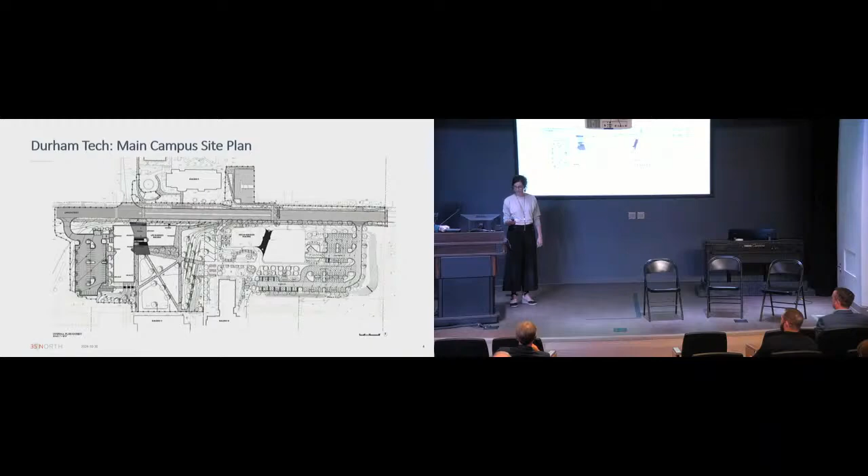Yeah, all right. All right, well, hello Durham Tech. Good to see some good familiar faces.

Before we get started, I just want to give you a bit of orientation of the campus, because you're probably not used to seeing your campus on plan like this. For the folks in the room, East Lawson is to your left, so my right, over here. So that's what we're looking at, East Lawson from left to right. The right of the screen is towards the highway, and to your left is Bacon Street on this side. We're currently in Building 5 over here. The two buildings we're building on the main campus are the Life Sciences building, located over here, and here is the Health Sciences building.

We're also doing two other aspects of construction on the site. The first is going to be improvements to the roads all across East Lawson that you see here. We're also going to be installing a duct bank, which means utilities - low voltage and Duke power lines currently on the poles - are going to be going underground. That's going to create a much nicer walk-in environment for the campus.

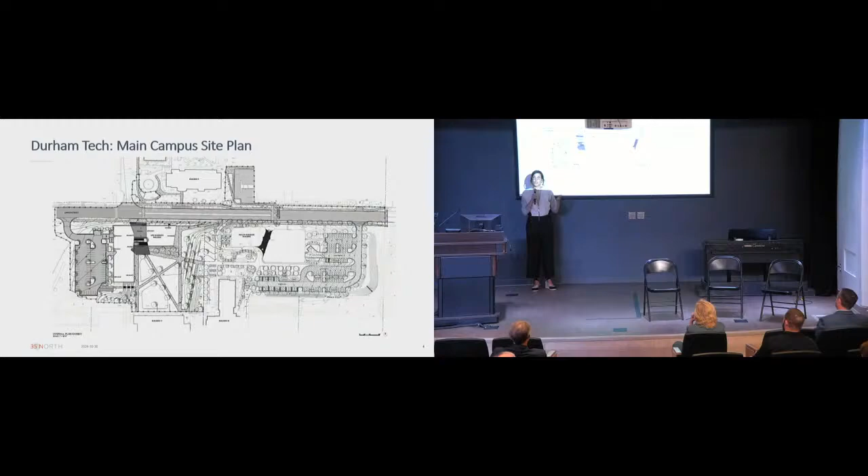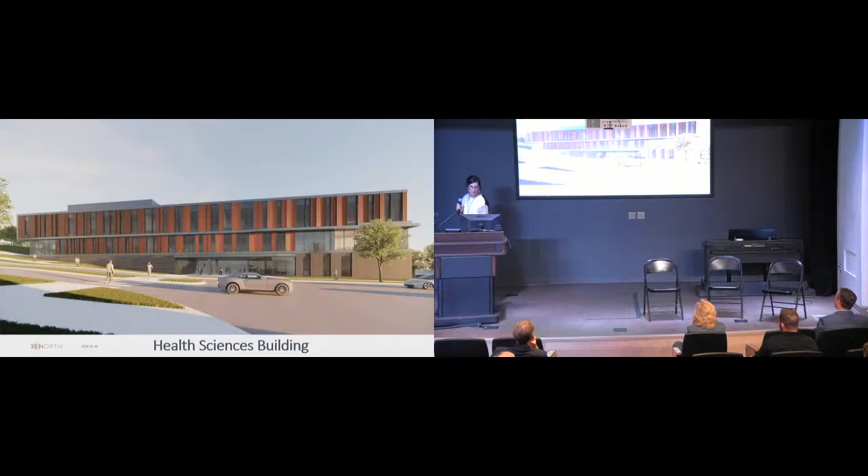Here's an exterior image of what the building is going to look like, from the view of where we're standing essentially today, from Building 5 looking south towards Building 11. Here's a little bit further down the street towards Bacon. And here you have the new pedestrian access, which will allow you to walk into the building, and also up to the second floor plaza that I'll show you a little bit later.

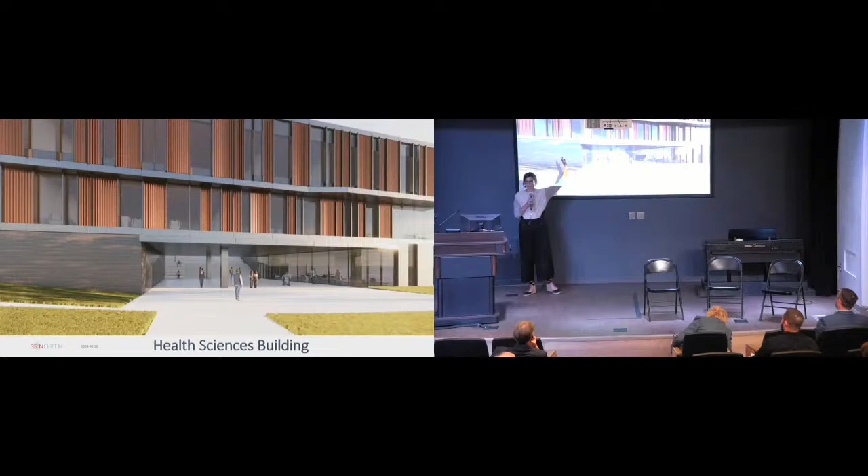Here's an exterior image of the view towards the building if you're standing from Building 11, looking northwise towards Building 5, where we're at today. You'll see the building's a nice L shape, and it's going to create a nice quad green environment where people are going to be able to sit, enjoy, and relax between classes.

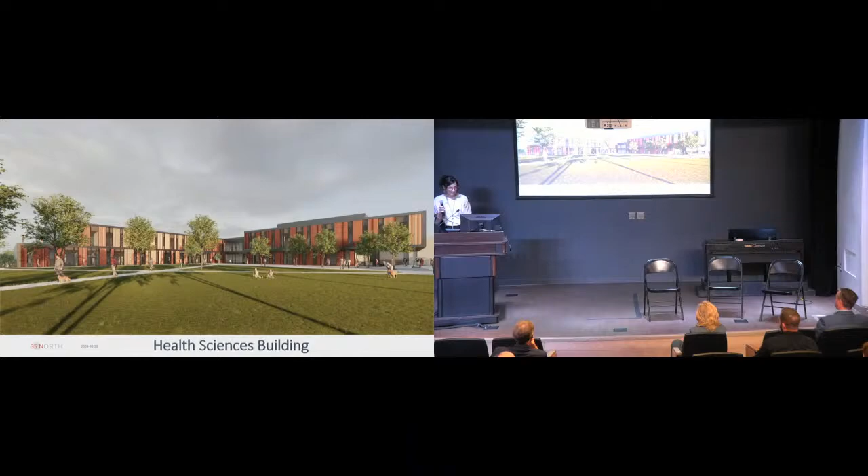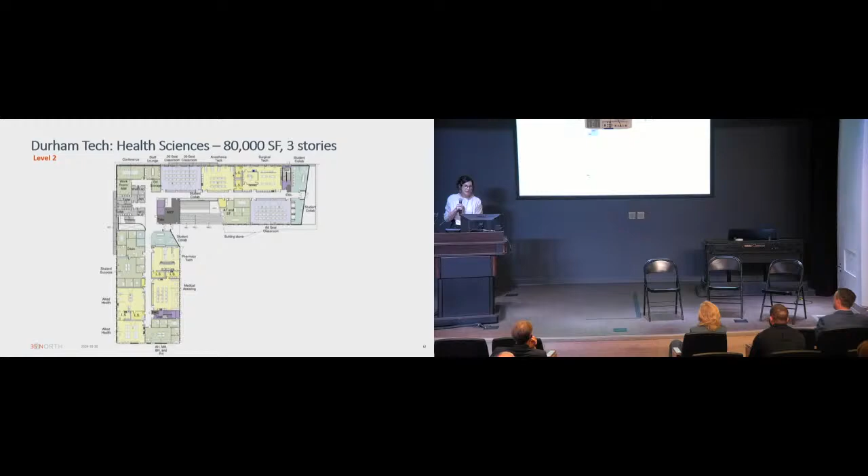As we move up to the second floor, you're going to be able to come out onto the main plaza, the green space that we were just looking at. I want to back up quickly and show you an interior rendering of what that first floor is going to actually look like.

This will be the main entrance coming in from the parking lot on the first floor, and then we'll have stairs around the corner to go up to the second and third floors.

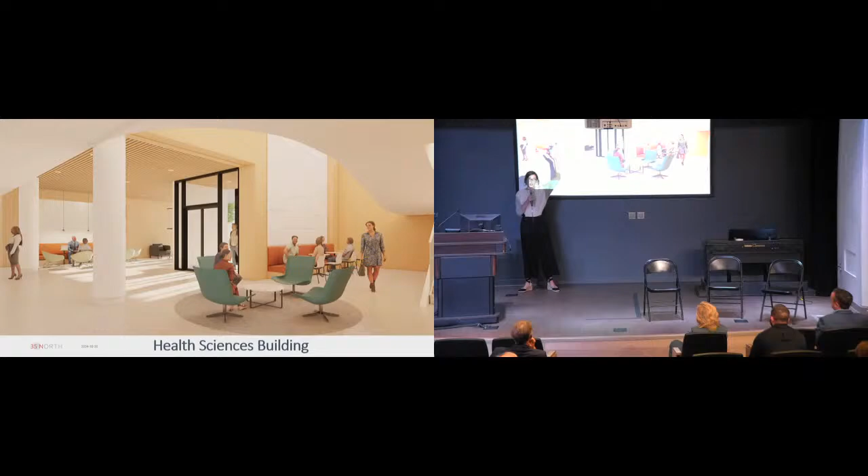Here's an image of the second floor lobby as you're coming in from the plaza side.

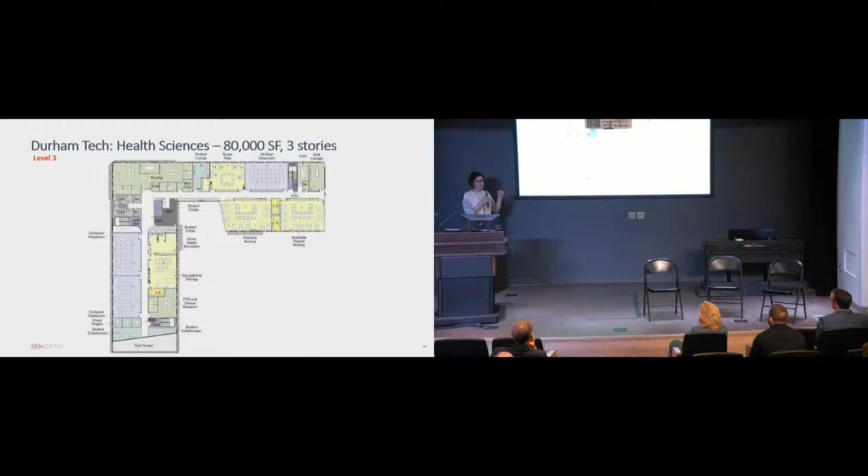Now let's jump to the Life Sciences project. This particular building is going to be one story, 30,000 square feet, and we're going to have a number of different classrooms, laboratories, and some offices for the staff as well.

Here's an exterior image of what the building is going to look like, and that is actually standing in the parking lot of Building 1, just a little bit further east behind us here, looking down towards where Building 8 is currently.

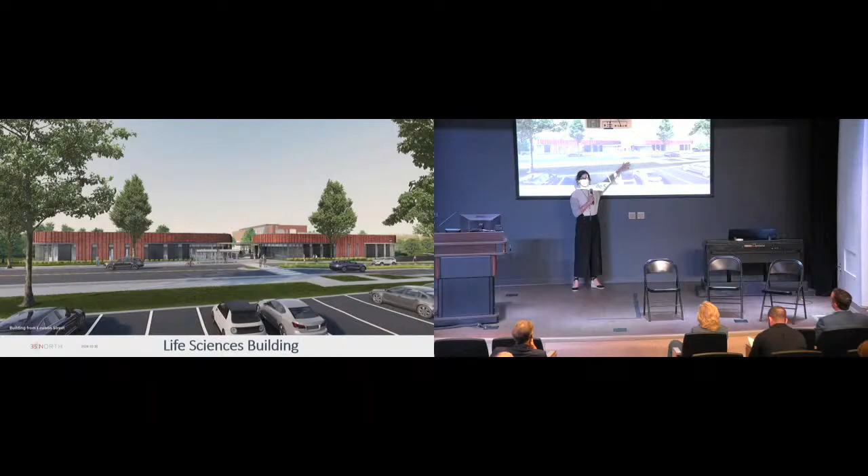You'll probably notice on this image, this bus stop here and this crosswalk is actually the exact same position as what it is today. We're not moving it, we're not changing it, so that might give you an idea of the area that we're looking at right now.

This is an image of the Life Science building, but on the other side now, as if you're coming out of Building 10, looking north towards this building.

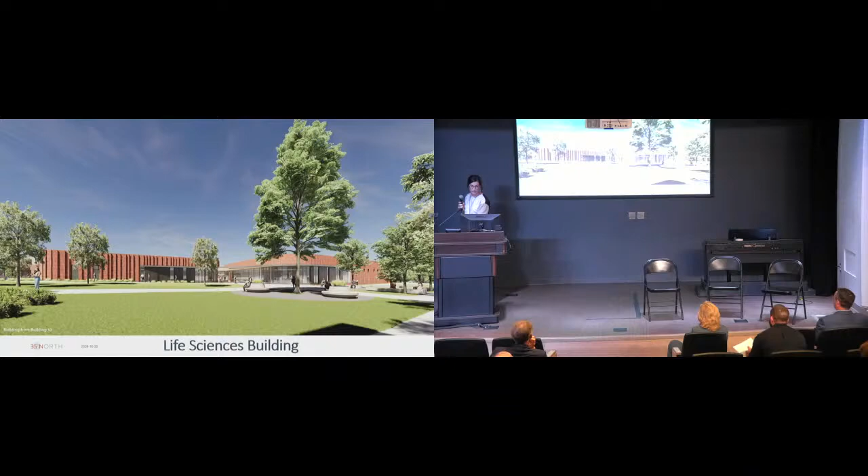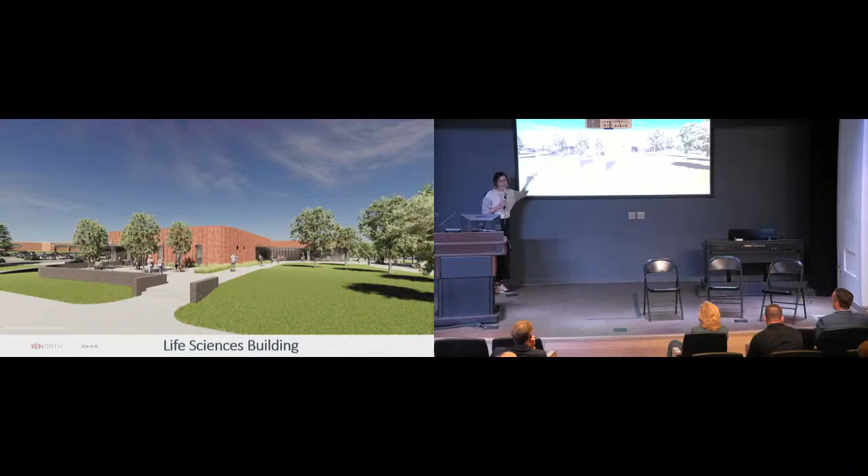Here's a similar orientation again, and you'll see that we'll have nice green seating space and plaza area for folks to enjoy lunch and have a break between classes, after classes, and you'll have access into and out of the building from all sides, this way and then through the front.

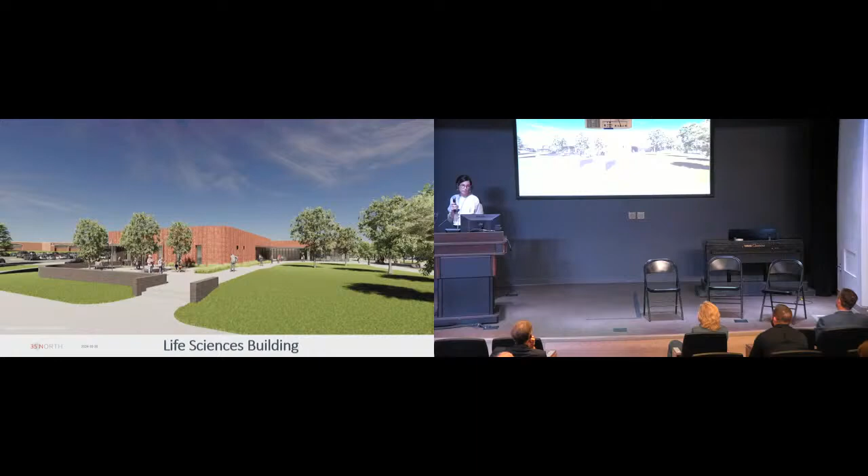Here's an idea of what the building is going to look like. This image might make you think you have two different buildings, but it's actually two pieces, or wings, combined into one building with a big roof over top. You'll have a nice wide open passageway in between to pull people in and allow traffic flow through to campus, to Building 10, 11, and some of the other parking areas on the site.

On this side we have what we call the teaching wing, where we have the classrooms and offices and student spaces for collaboration, eating, and whatnot. On the right side, we focus the majority of the laboratories with all of the lab equipment, and technical teaching is going to be happening on this side of the building.

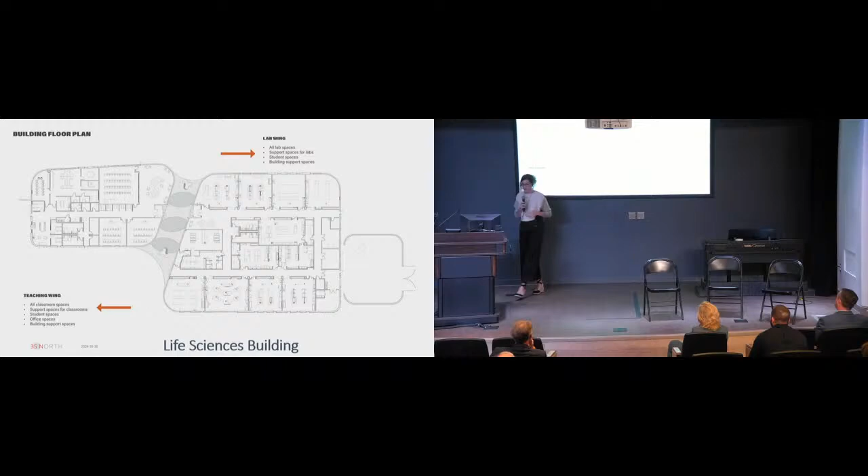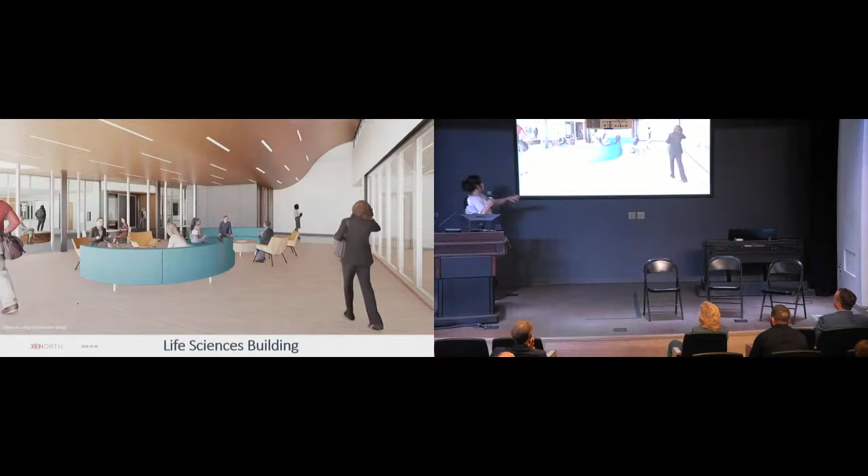Here are a few interior images of what we're expecting the main lobby to look like, and this is on the teaching classroom side that you saw over here.

Now I'd like to hand it over to Greg, who's going to walk you guys through the logistics plan for the main campus.

Thank you, Marie. My name is Greg Cooper, Project Director with Skanska USA Building. It is my honor to have the task of building two of these buildings here that we're talking about today, Health Sciences and Life Sciences, and I'm going to walk you through our process and how we're going to minimize disruptions while we build these over the next two years.

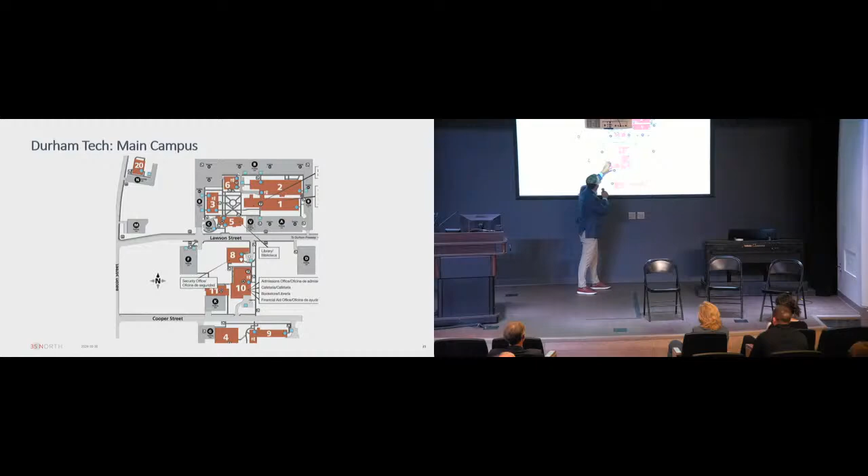So to start off, this is the main campus map. We're sitting here in Building 5 currently, right up here. We know Lawson Street cuts right through the middle of campus. So our two buildings are going to sit side by side just south of Lawson Street, right here in the vicinity of Building 8, Parking Lot F and Parking Lot D.

So Health Sciences will sit here, Life Sciences will sit here. It'll be a beautiful view across the street from this building to watch us perform the construction. Hopefully you like it as much as I do.

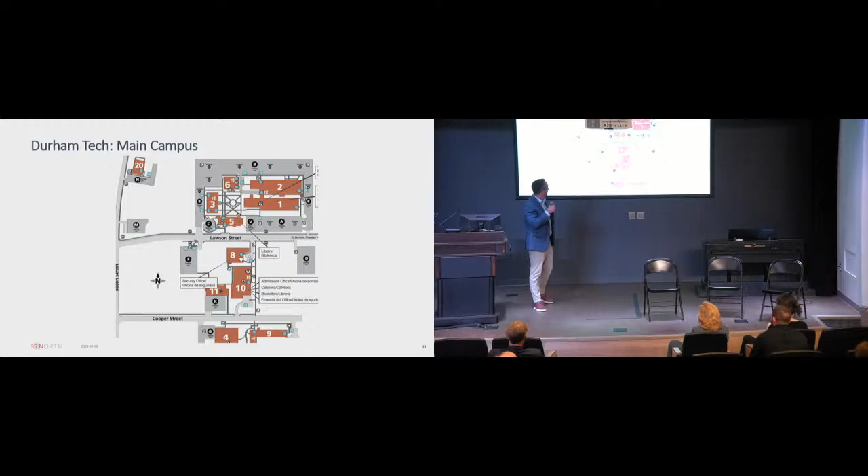So to note, Building 8 is going to be demolished March or springtime of next year, so it'll be out of the way as we start construction.

So this is kind of neat. All the shapes that Marie just went over with you of the actual buildings, now I get to overlay it onto the actual land. So this is Google Maps here. This is parking lot F. This is where the health science building will go.

As you see, we will put our perimeter fencing around the entire building job site. We'll come in early next summer, around June 2025, and set up site fencing on both projects. We'll put in pedestrian pathways and temporary walkways to make sure students and faculty can walk through the middle of campus, from the north side down to the south side.

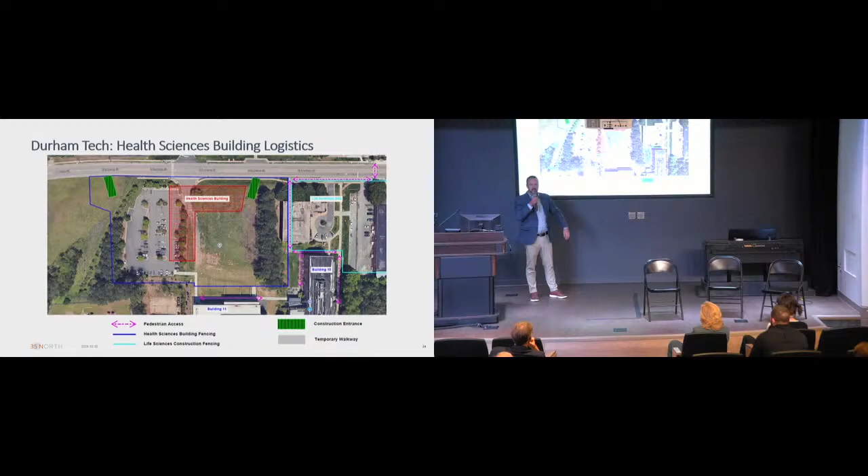Building 11, building 10, all the walkways around there will remain active, so you'll still be able to get around those buildings. The green here at the top, both sides, is our construction entrances, where we'll bring in all our trucks and traffic into the job site.

One other thing on duration: we'll break ground on this building September 2025, a 2-year project. It'll wrap up fall of 2027.

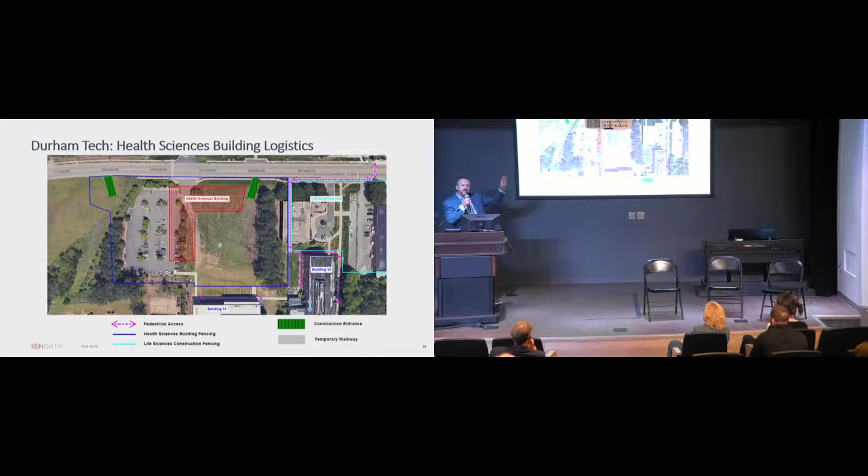So moving over to life sciences, I'm sure this looks familiar to you as well. This is parking lot D, where we will be building the life sciences building. Again, perimeter fencing, construction entrance in the top right, and pathways still getting you through campus. One thing I wanted to mention, as this pathway comes along Lawson Street, it'll take everybody across the crosswalk at the bus stop, which will remain in the same spot.

So this is an 18-month project. It will start, breaking ground in fall of 2025, and finish 18 months later, in March 2027.

As Marie mentioned, the last component of the project is the roadway renovations. The first thing we'll do is take all the overhead power lines and put them underground — we call that electrical duct bank. We'll start at the east end of Lawson Street, working west. The actual duct bank will be just south of the roadway, about where the sidewalk is at.

We work in about 50-foot chunks, starting from the right and finishing each section before moving to the next. Over 9 months, we'll be excavating, putting in piping, and having concrete trucks stage on the side of the road to pour. We'll do those concrete pours during off-peak hours to minimize traffic disruption, and we'll have flaggers out there to direct traffic as well.

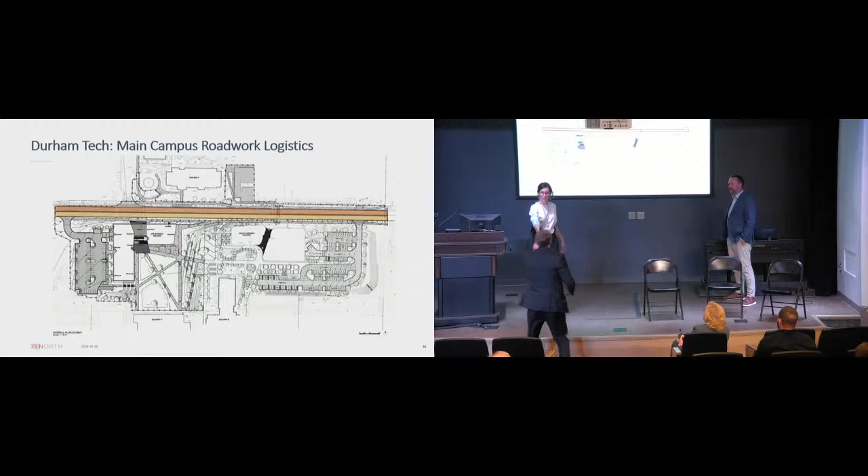If we can go back one slide, I just want to make sure people see a couple things. One is, up here where you go to the circular, we're going to have a much clearer pedestrian walkway down the right side that takes you straight across to health sciences.

Right here at that crosswalk is going to be a 3-way stop, so when folks come in, they're going to hit a light and have to stop down at health sciences, whatever direction they come from. This street is going to calm down dramatically, and with a median in the middle, there won't be any more fast passing in a middle lane that doesn't exist along Lawson. This will be a much reduced speed, with 8-foot sidewalks.

Thank you, good point. And I was going to mention you're going to get all your parking back in these parking lots, as long as you bear with us while we construct them.

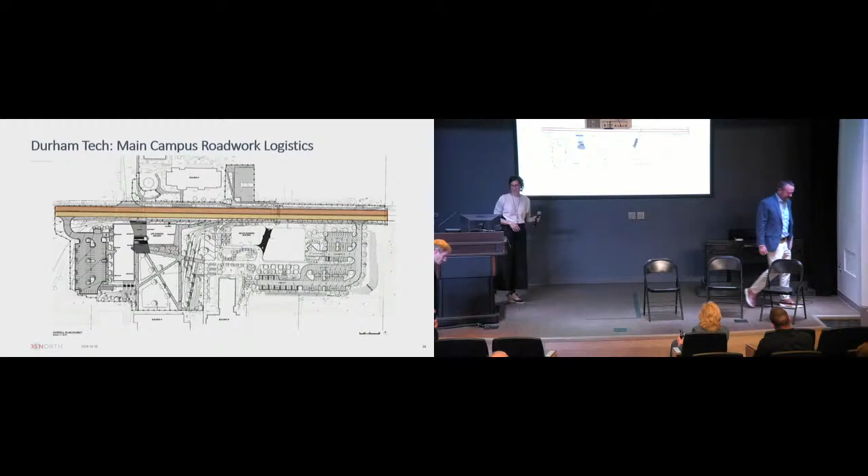All right, Orange County. So what we're doing at Orange County is a little bit different - we're not adding a brand new building, but adding an addition to it, approximately 14,000 square feet, on 2 floors. So we're adding to the end of the building, and you'll see exactly where that is in a moment.

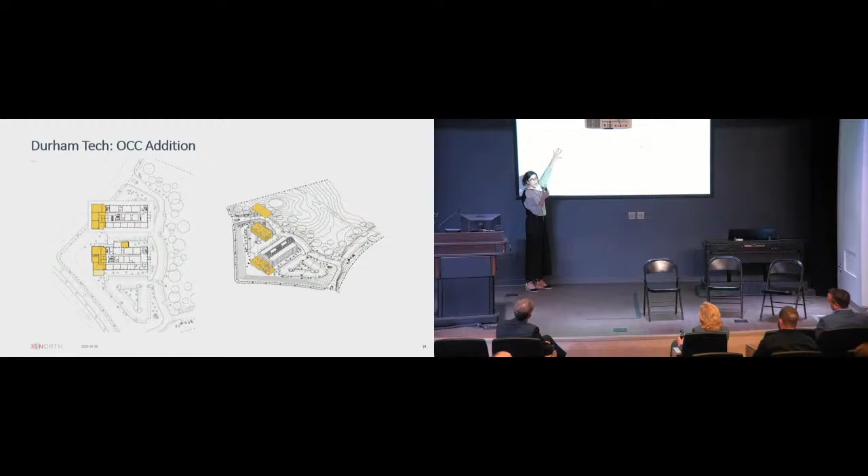So we've got our first floor with a nice outdoor seating terrace area, then the second floor, and then the roof. We've got about 7,000 square feet on the first floor, another 7,000 on the second floor. This is going to create additional space for expanding some of the programs and bringing in new programs at Orange County - we're going to be increasing capacity for EMS, allied health services, allied health and wellness, and skilled trades as well.

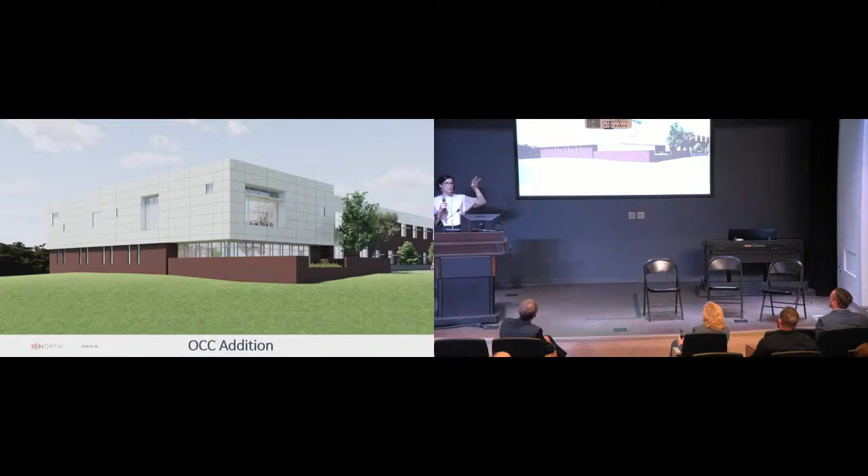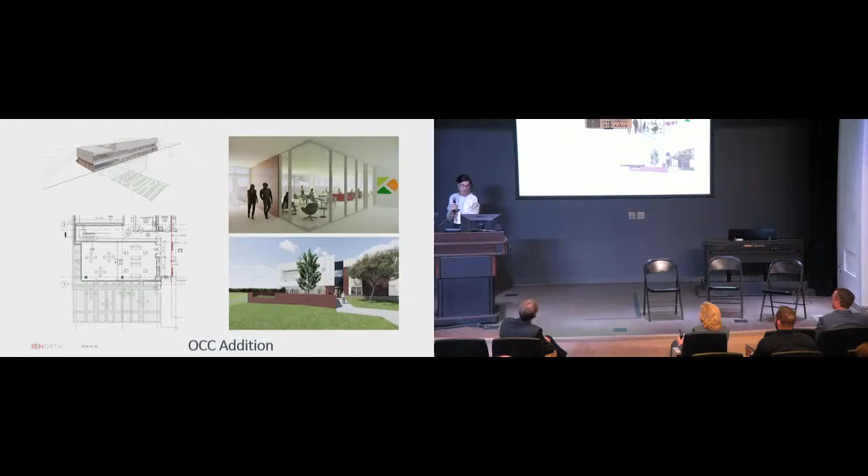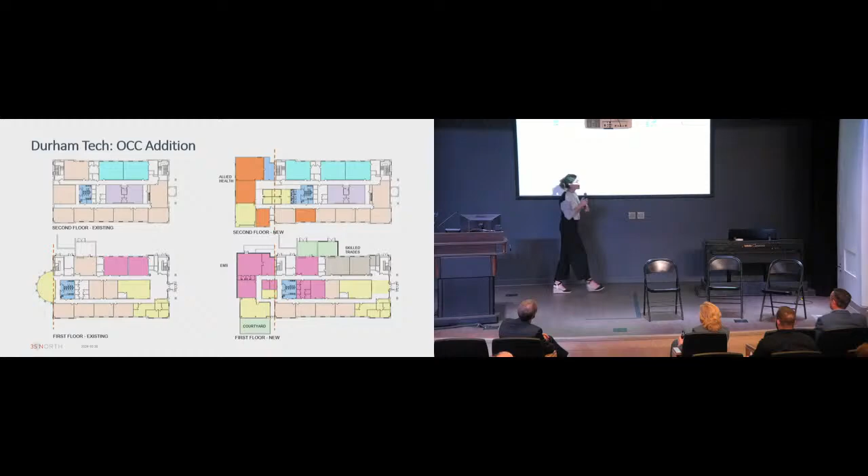Here's a summary of what the floor plans look like. To your left, we've got the existing floor plans, and to the right are the new ones, so you can see where we've added the additions. The orange at the top is the second floor, and those are the allied health programs - they're going to have additional rooms than what they have today. EMS is in pink, and skilled trades is in the taupe color over here. And we are not removing any classrooms - we're actually adding 1 classroom that's going to have more technology than what you have today.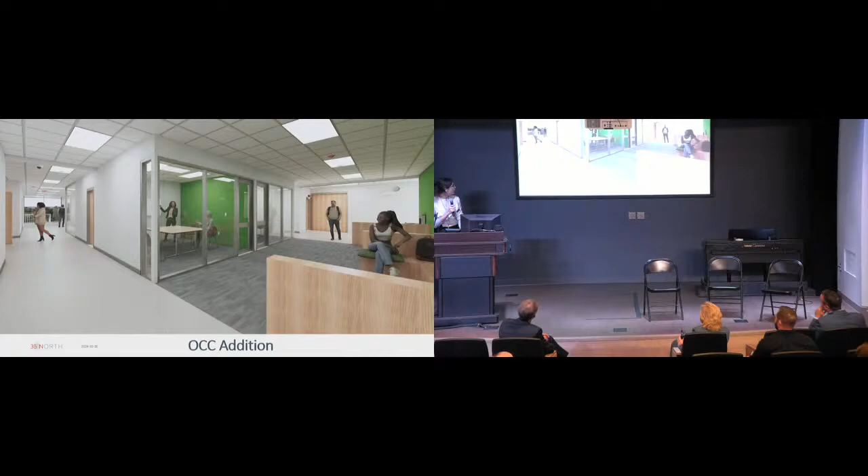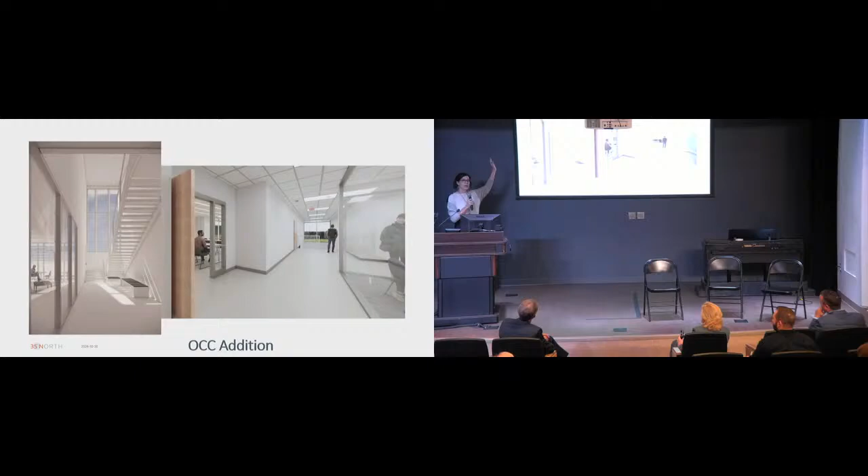Here's a few additional renderings that we have. This particular area is for the second floor in the addition, that's going to create some new meeting rooms and seating spaces for staff and students alike to sit, study, and meet with their colleagues. And here's an image of a new interior stairwell that's going to be just adjacent to the cafeteria - it'll give you another access to get up and down the stairs and also bring a lot of light into the building.

Oh, and this is where the HyFlex classroom is going to be on the second floor.

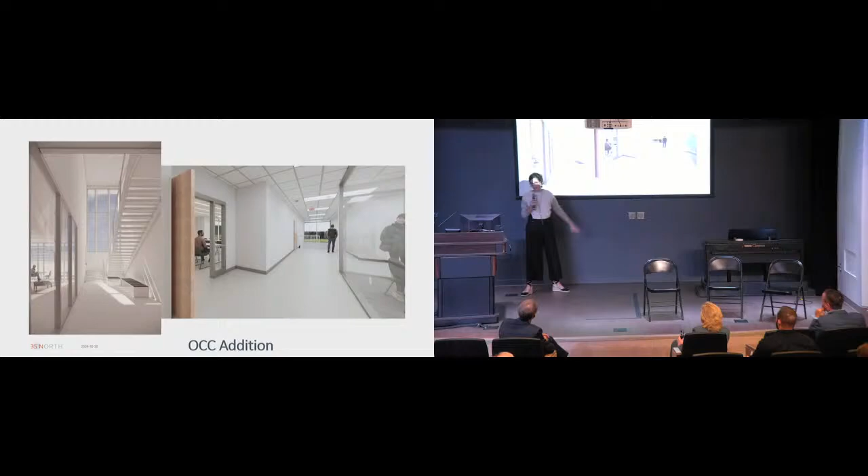All right, and now I'll pass it over to Corey with Samet, who's going to walk us through what the construction of that addition is going to look like.

Good afternoon. My name is Corey Shearer, project executive for Samet. Normally when presenting last, I like to joke about saving the best for last, but we've got a really great lineup of projects here, and it's great to see the commitment from the college to their students, faculty, and programs.

What we saved for last was a different set of challenges: an occupied, phased renovation and addition. This means our day-to-day work has to be closely coordinated with everyone in the building, especially any type of interruptions or shutdowns when making connections to utilities. We like to call it a good neighbor mentality—the less we're seen and heard, the better. But that's difficult if we've got a 100-foot crane out there or if we're doing demolition.

Like a lot of things, the most important thing here is communication—letting the college know of planned activities and forecasting shutdowns not just weeks but months in advance, so we can make good, informed decisions. The safety of college faculty and staff is of the utmost importance, along with mitigating any impacts to the programs going on.

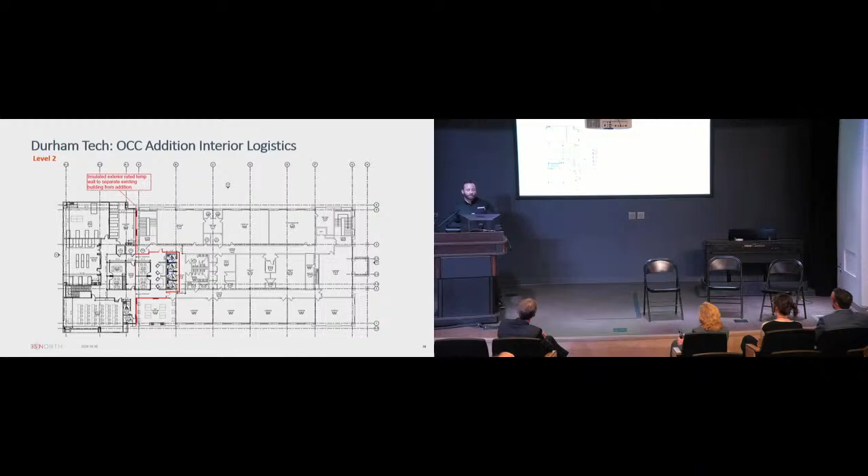So that is our formal presentation. Now it's time for engagement, meaning we're looking for audience engagement and some questions.

I do want to say one thing before we leave OCC, and this may disappoint some of you, but we are changing the water system in the building so that our toilets will work. You didn't have that detail, but I just knew they'd feel passionately about that.

We have a question online. Go ahead, Tony. So the question is, they're interested in knowing whether or not we're going to have all gender restrooms in the new buildings.

Yes, for those wondering, let me see, Marie? Yes, so this is Marie. Yes, we will have gender-neutral bathrooms in all three of the buildings, and we'll be adding some in the existing addition at Orange County as well. And I'll add lactation and wellness space in each building.

Next question online: when burying power lines on Lawson, should we expect power outages or disruptions? Will the generator be repaired before then?

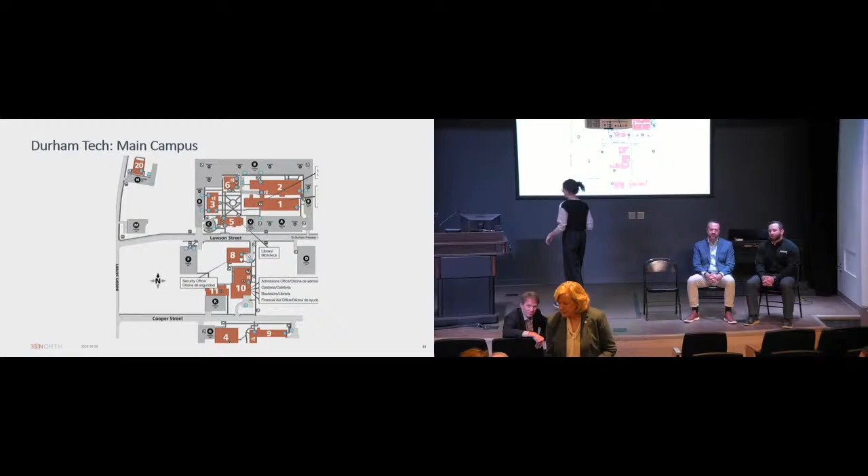Yeah, I don't know if I have that much to add, but we got y'all, we know. In fact, we did some rearranging of spaces - I'm like, wait a minute, can they get stuff around this corner? So trying to think about door spaces and entrances, and even the equipment we are bringing in may be a little bit larger because of the newer beds and things like that. So we've definitely had that on our mind and how y'all navigate. What else?

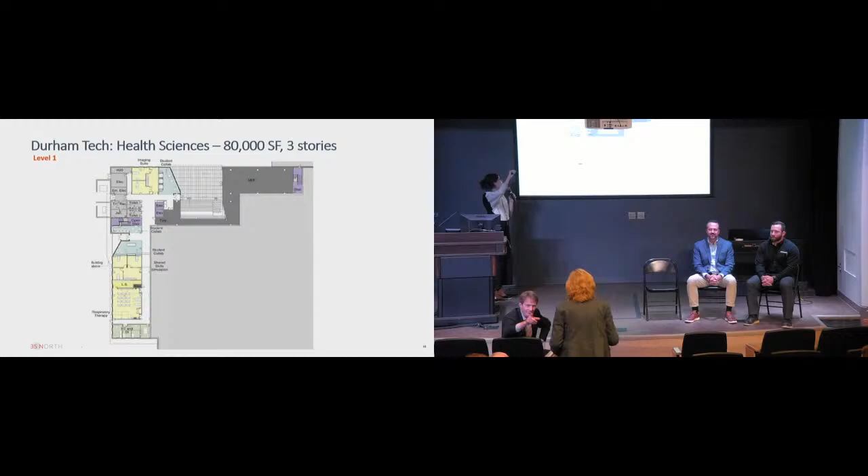Yeah, I think they mentioned that. So hospital size, making sure that there are elevators that will fit that equipment as well. So yeah, we got you. And you probably can't see this, but I'm pointing to the set of double doors here at the loading dock. So that's going to be off the parking lot on the west side, on the Bacon Street side of the lot. So you're going to be right at the front of the building here.

Can you all speak to the accessibility features of the building? So physical accessibility and other elements? Sure, do you mean specifically access or anything else? Access.

So definitely everything that we're building needs to meet code, which is ADA compliant. And so we will have elevators in every location, and any ramp that we have leading to the building will be compliant with the maximum slopes that we need.

We haven't quite finished the lighting controls, but there will be -- what's the word I'm looking for, Greg? -- occupancy sensors and whatnot. And we're also going to have the ability to dim lights in certain areas. That's been highlighted and discussed with the academic staff. With respect to, what was the other question you had?

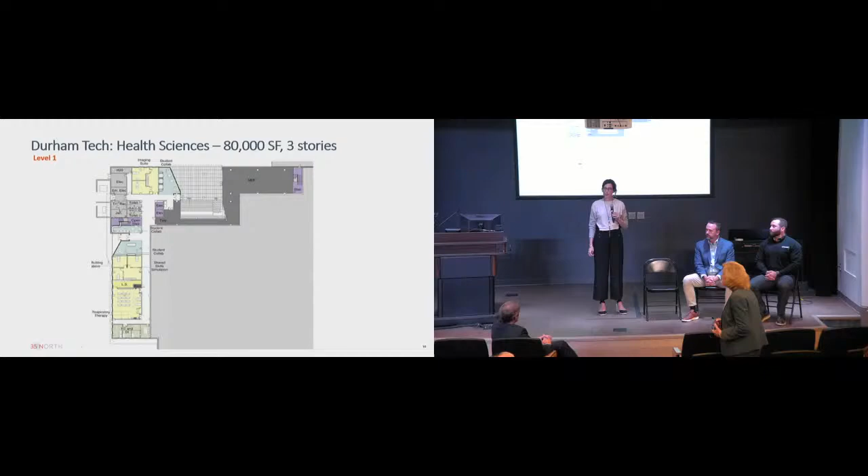Oh, door access and waving. So we will have push buttons in certain areas, and we're still working through all the different doors, actually with the chief of police and Marshall's team, to make sure that we're taking into account all the different areas that we need to have those available.

Thank you. Oh, okay, and then I'll go to you, Tracy. I'll be right up, it's okay.

So for outages, how do we plan for keeping refrigeration and incubation needs online? You want me to take this? So I can start, go ahead.

I don't want to make any promises for Durham Tech, but on construction-wise, we always plan those well in advance. And if there are critical pieces of equipment where you need refrigeration to stay online or other things like that, generators can be brought in. So you can switch the feed over to a generator, power up those critical pieces of equipment and components in your existing buildings while the power's down and the switchover is made. So certainly, as we learn more, that can be further developed and we can nail that down.

Yeah, I would just say that we make sure when we send the notices out that we're going to have a power shutdown or something, that anybody in their area that needs those kind of services, they reach out to us and we'll make sure that we provide what you need for your area to be able to keep it. That's a good point.

Yeah, I think we're looking at this, and Corey mentioned this, but I do want to let you know, we understand how disruptive this is going to be on campus. So I pledge to you, we will keep the communication going so that people know what's happening. We will have QR codes that tell you how to get to different places. In addition, we'll have the website that will have live updates. So we know communication is key. We want to make sure people know what's going on and can react to that.

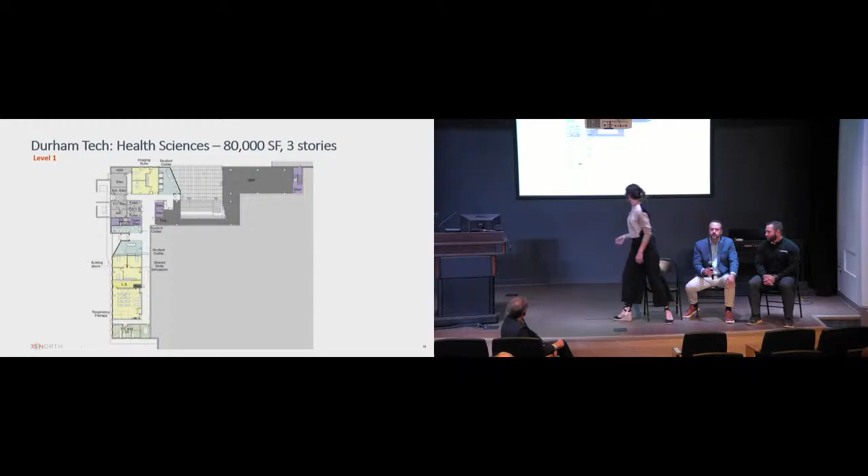Sure, I know you mentioned median -- let's look at it again. Do you mind putting the logistics slide up for the main campus? No, this is very key. Sorry, I don't know if I heard the question properly. Can you talk to pedestrian walking on campus during construction? That's your concern? Yes, across Lawson in particular? Yeah, probably the health science. Very important. I'm getting there, there we go. This one. Yeah, either one.

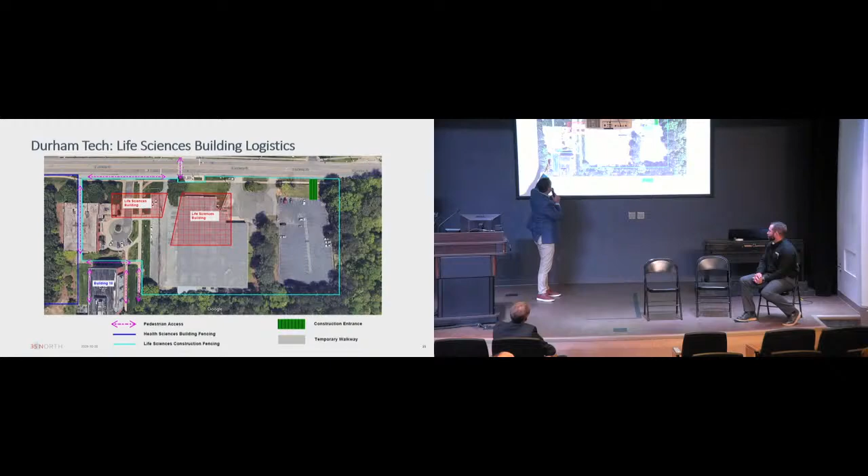So the main goal here is to have a pathway that splits both of the job sites, because if we combine the two job sites together, it would be a long walk around either way, right? So what we planned was just go right in the middle of them, put an 8-foot wide sidewalk that's ADA compliant. So this is going to be a 1 in 20 slope, wheelchair accessible. It's actually 185 feet long is what the math works out to.

But starting all the way from back here at the beginning, south side of Building 8, all the way over to Lawson Street. And then we would tie in to the walkway that's currently there to get over and go across the crosswalk, right? And so coming north to south, then you tie into the existing east, west, north, south current sidewalks that are already there at Building 10, right?

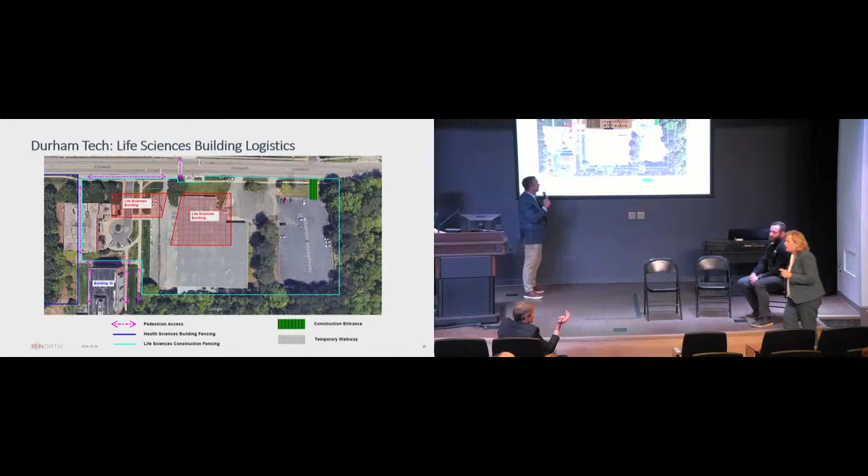One of the things we haven't really spoken about, and I'm going to have Marshall talk to this, is when we demo Building 8, which is going to happen before that. I'm going to ask Marshall to talk about that project from the standpoint that the circle in front of 10 is going to be removed and where ADA parking is going to move to.

So that's all going to go away. What we're doing is behind Building 10, we're going to be installing a new sidewalk from that back area all the way around to the entrance of the dining area for Building 10. So the parking behind Building 10 will be reallocated for handicap, converted over except for the service vehicle spot. And we'll have a sidewalk that goes right up to that sidewalk leading into the dining area so we have ADA accessibility from that side.

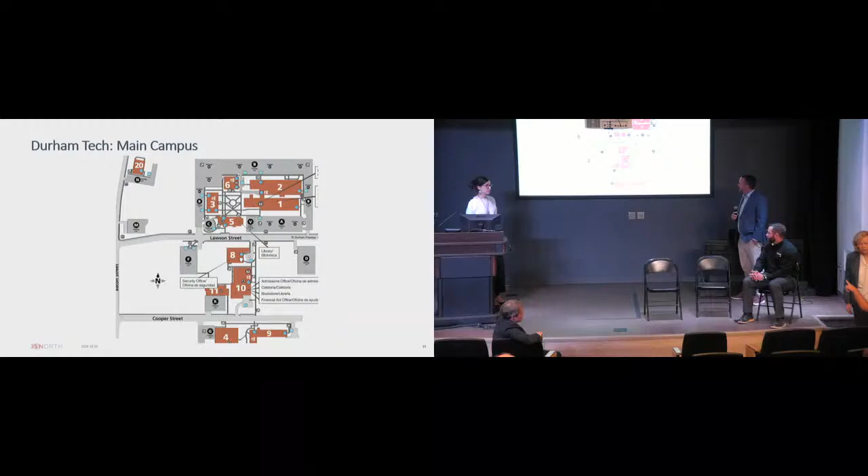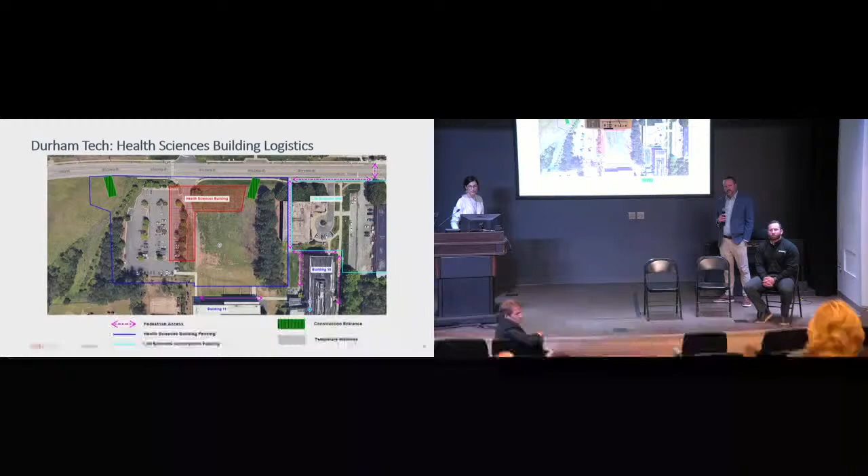Just thinking about the future EV and the future parking lot, is there any charger for any teacher that has an electrical car? Great question, spoken like a true electrician. Marie, you going to answer that? I got the answer. The answer is yes. And so what we're going to be doing is providing, keep me honest, is it 9 or 10 spots?

Marshall, don't remember. I believe it's 10 on this side here. So we've put them all together on the life sciences side, right over here. This whole row is going to be EV charging, and we're actually going to have one of these as an ADA spot as well. So we got you covered. And that is code, correct? Correct. That's part of our state construction submission now, that we must provide a minimum number of spots for electric vehicles. So we've combined them in one location here, kind of central to campus. Good question, electrician, I know.

Another online question is, do we have a staffing plan in place to account for the additional maintenance, shipping, receiving, et cetera, that these new buildings will add to our already strained system?

I'm going to go to our CFO on that because he's done a great job. Yes, when we presented these to the county, we have to give them a projection on the operating costs for the new buildings. So there will be additional housekeeping, facility, and campus police that'll be coming on to these buildings when they open up, and the county did have to sign off on that.

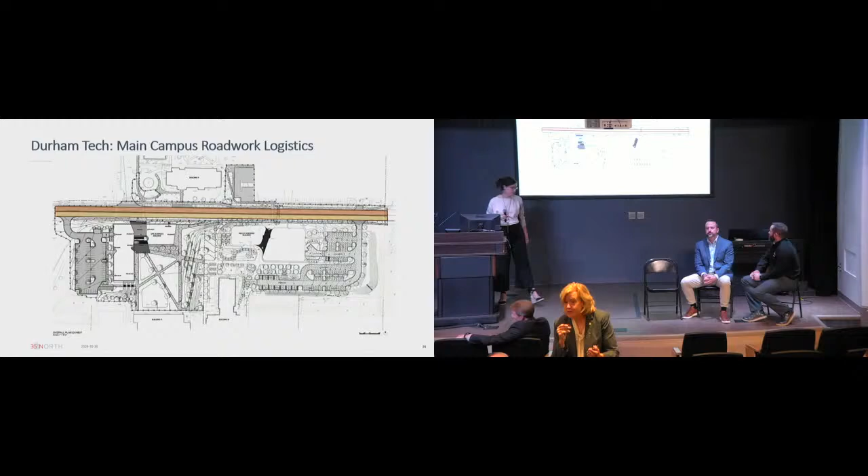But that's a great point, I think we need to note that. This is the kind of comments we'd like. Let me just go up to you. Go ahead. It was more or less the same thing. Are we going to have everything in place before 8 and the circle go away? In other words, the sidewalk, the parking, all will be redesignated before the buildings go, so we're not going, oh, where is it now? Yes.

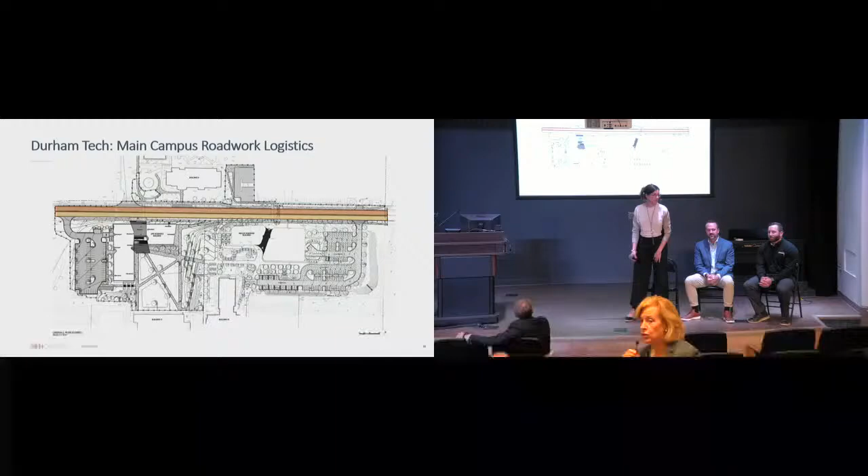The Building 8 construction, we're working with 35 Degree North, but that's a project that Marshall is spearheading, so yes, we will have that all in place. And what Greg is talking about as far as the fencing, that will be put in place predominantly not because we're going to start construction this summer, but we want it in place before the semester starts so that people get used to navigating, correct? That's right.

I was just going to comment on Makara's question. With Building 10, the ADA parking behind Building 10, I was thinking about some sort of drop-off instructions in that area, because it's still going into 10, if there's no more access to 8. So maybe signage that can utilize that. Which presents a challenge, because we also have deliveries back there. But that's exactly the type of feedback we're looking for.

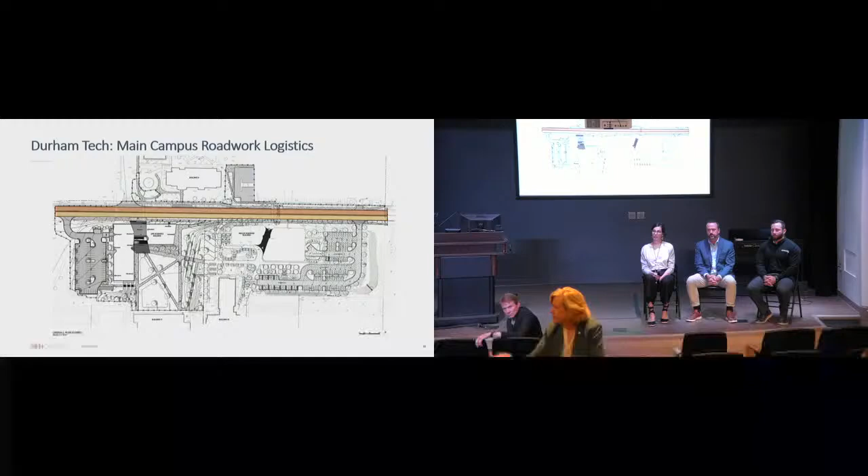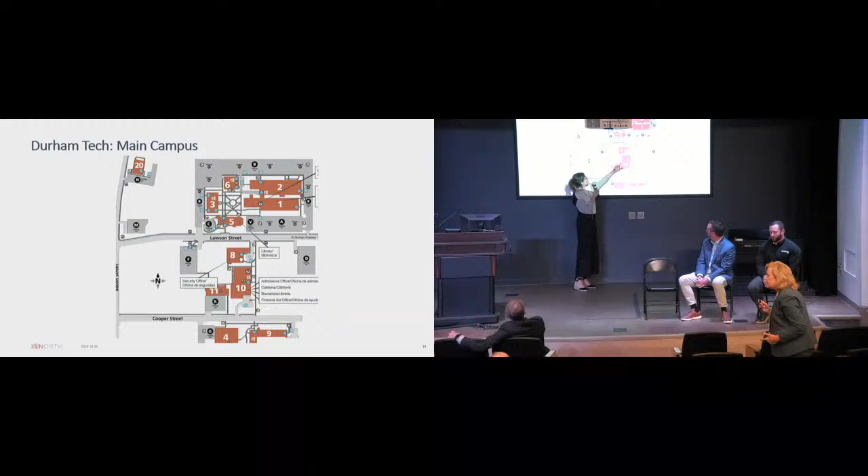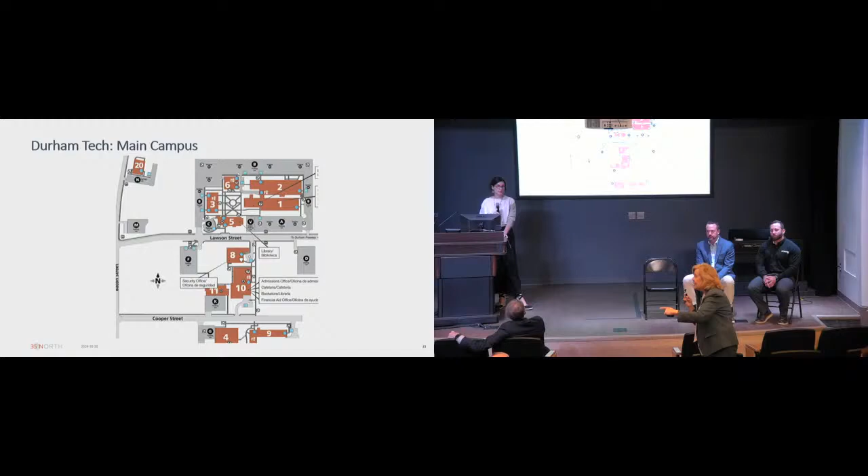Yes, a sidewalk, it's ADA compliant. It'll go between Building 10 and 11, from the edge here, right between the buildings to join the sidewalk. If you've walked it, it seems a little steep, but we've walked it and we want to make sure it is ADA compliant. President Buxton mentioned this came clearly across in the revision of the master plan. We are going to ensure the buildings are built really geared toward responding to our ADA community.

I think there was a question at the back, Susan. Yes, hold on. It's okay, I didn't exercise this morning.

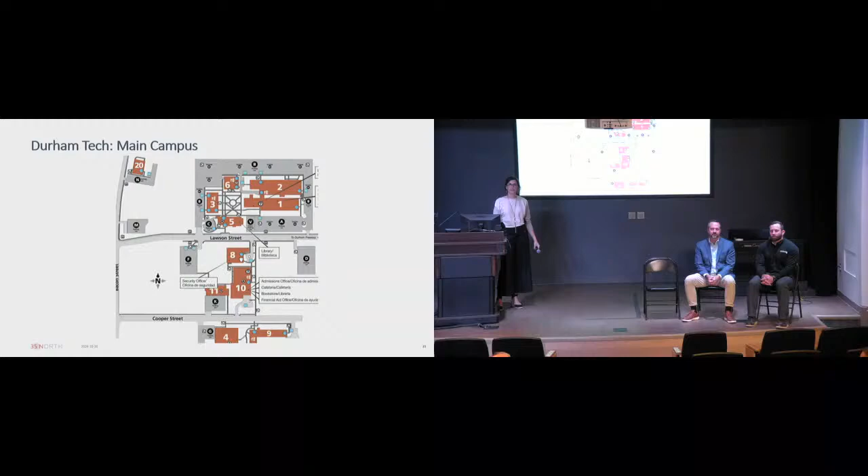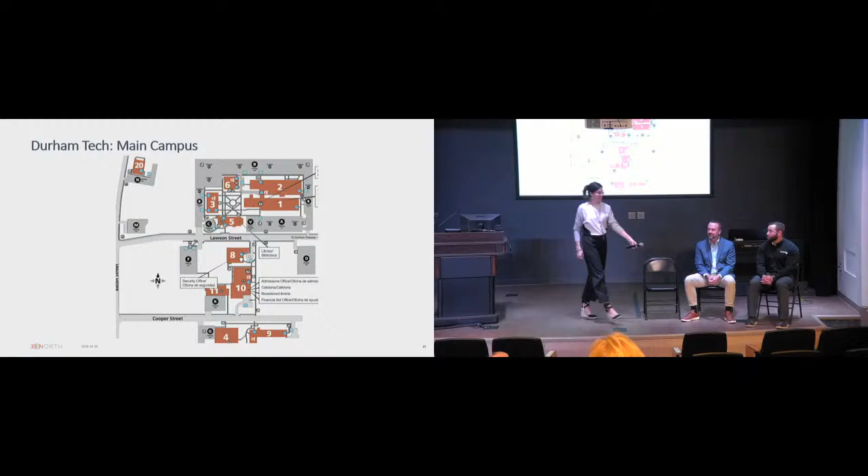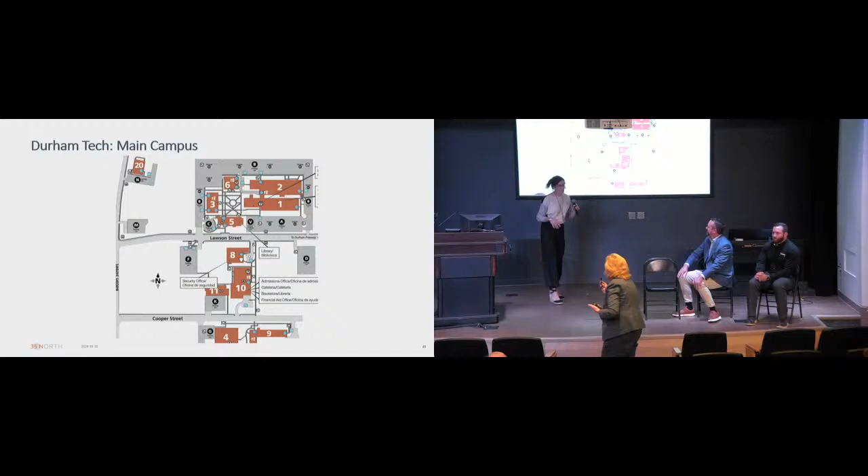Is that ADA parking and sidewalk remaining post-construction, or is that temporary? Well, what we haven't said is that there will be additional ADA parking in Lot A, so we're moving some across the street too. Let's start with the sidewalk. This is our final plan with all the buildings and parking shown. The new sidewalk from the back of Building 10 going to here is going to remain, so that will continue to be used.

Now what we're doing is adding a whole lot. All of these banks of parking are ADA parking, I think there's 15 in that location. That's right in the middle between life sciences, adjacent to Building 10, and close to 11 as well if that overflows. I don't know whether the ones here are going away, but I know we're going to have lots supplementing this area as well. We have more than the minimum required, much more than the minimum, so you won't be running out.

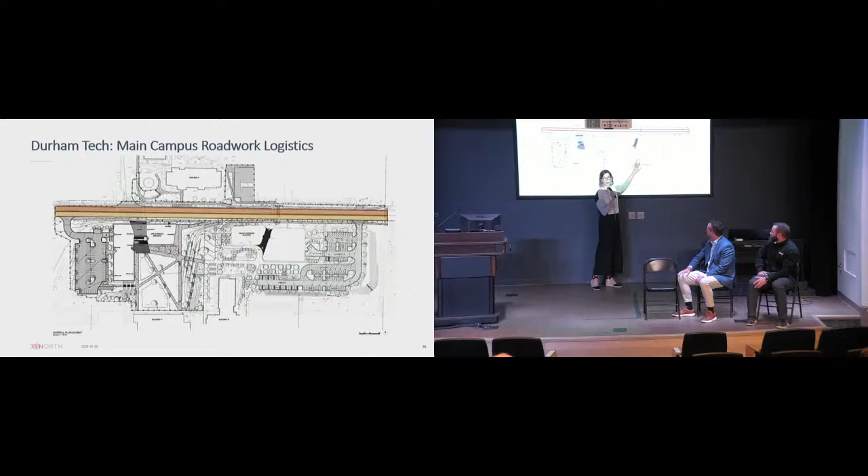Question online: is there the potential to add improvements to OCC in the process of the addition? Example is DI water systems for the science labs.

Do you want to answer that? Let me just say a couple things. We are looking at the entire water system at OCC because we need to make sure that we have enough pressure and water to feed the addition. So we're hopeful that the challenge we currently have with those will be gone. That's our intent.

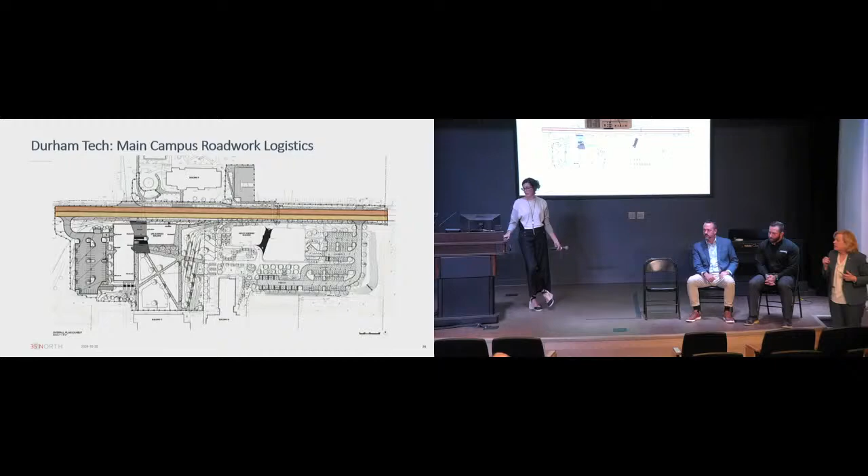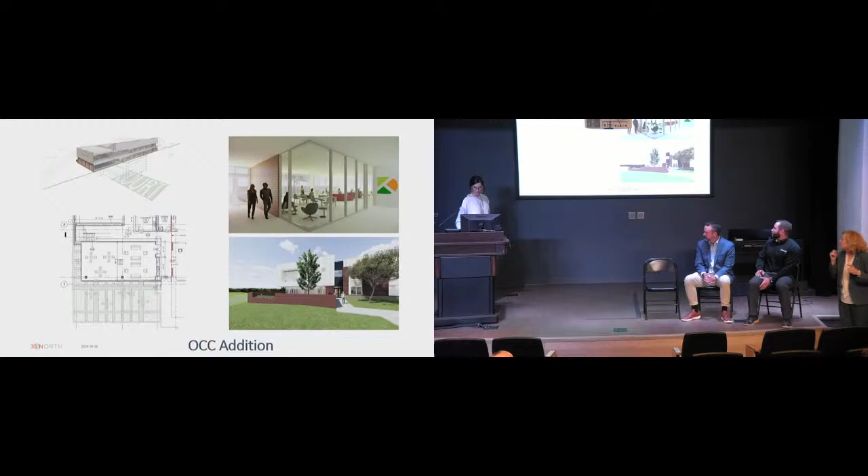Susan, would you say something about renovation on the existing OCC in addition to what's happening? Sure. What we've spoken about are some classrooms that currently exist that will be renovated for skilled trades. We're looking at hopefully renovating the library, we're looking at the lobby area, and we're adding an area for food pantry services there. Did I leave anything out?

Oh, and the lights. We were fortunate enough, the county has given us additional money, and JB will speak to our sustainability goals with all of this, to go with new lighting throughout the entire building that is much more sustainable than we are now, energy-wise.

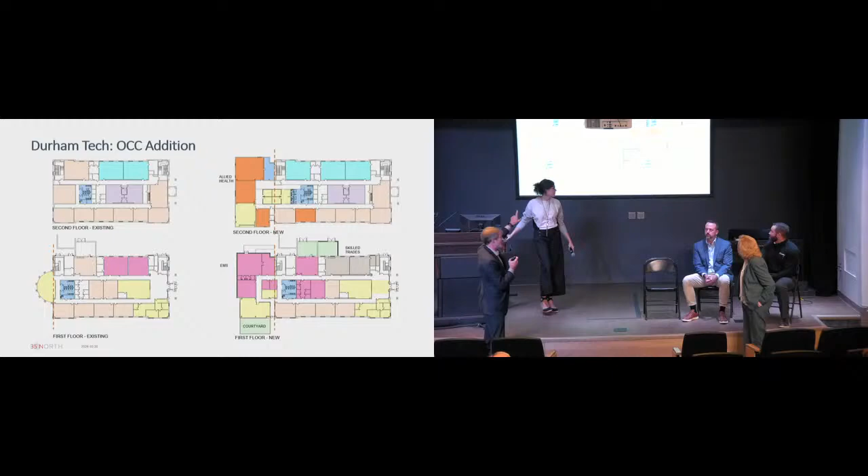Did I forget anything? No, I think that's it. You're going to see, when you walk into OCC, you're going to be looking at a glassed-in library, essentially. It's going to create a much more welcoming space to get drawn into that library. The whole lobby is going to look a little different in presentation. And as you go down the left hallway, past the stairway, you're not going to be looking down like the old high school hallway. You're going to have a light-filled window and stair at the back.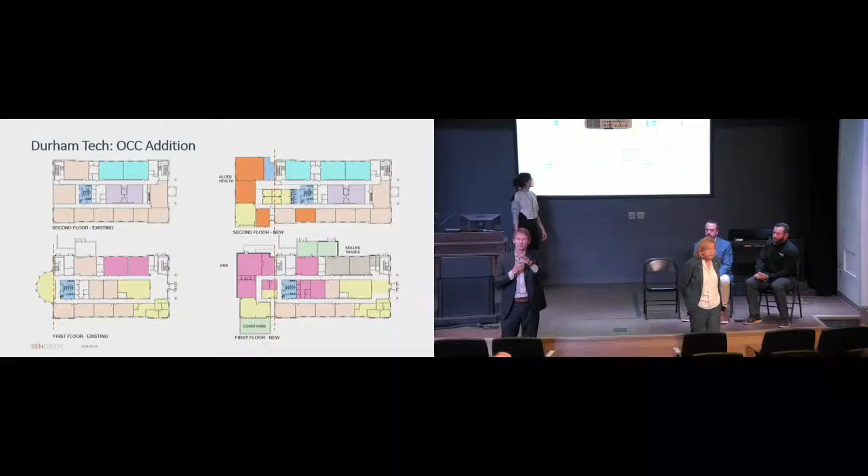So we're not losing any classroom space, we're adding classroom space from what's there now. We're adding skilled trade space, renovating the library, adding student spaces, and then there's the addition with all the different classroom, lab, student, and faculty spaces in there.

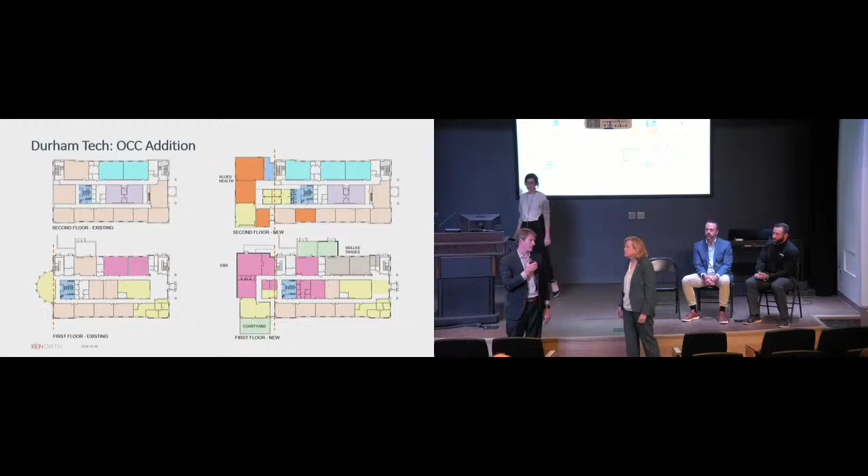I do want to let you know we're in the third phase of the project, design development. This is where we get down to the dollars and cents, and what our dream is versus reality. We've been in meetings with almost each building, and we'll be doing that shortly with OCC to determine our priorities, what we can do, and if we need to cut anything out. Throughout this process, our goal, and the president has been very clear, is focusing on our academic spaces in each building.

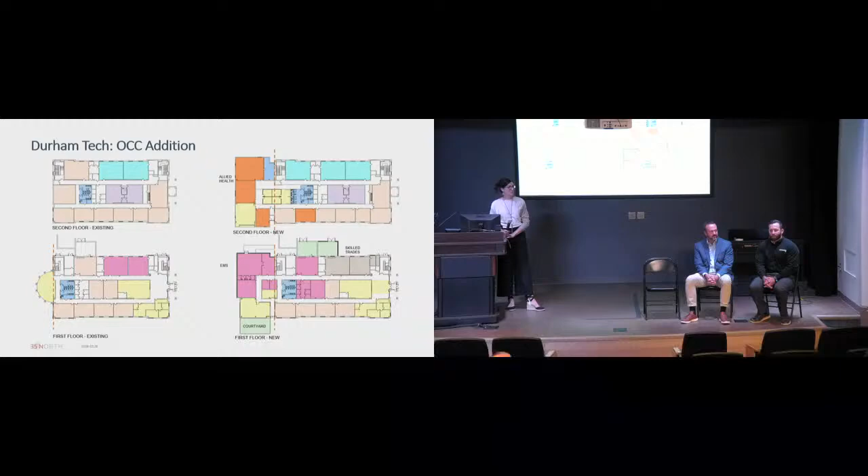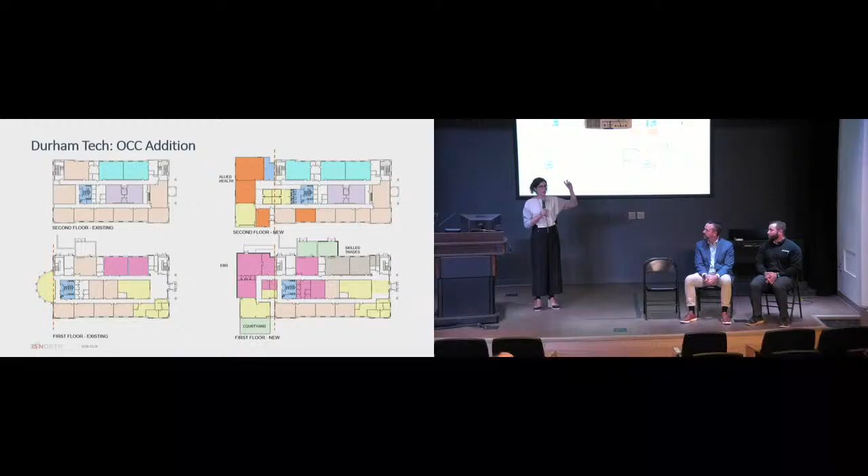Online question: any thoughts on using solar panels on the rooftops? That's a good one, go ahead Marie. Great question. I don't want to take too much from the sustainability goals discussion, but that's something we looked at extensively. Part of our state construction submissions requires very extensive modeling to see what gives us the best bang for our buck and what's most efficient. Solar panels on the roof are always hot, everyone talks about it, it's the cool thing to do. But when it really came down to it, talking with partners at Duke University, who are very sustainability-focused, they said what you really want is, it's great to add green energy, but where you get your biggest bang for your buck is getting the most efficient systems in the building to operate. That's really where you need to invest first.

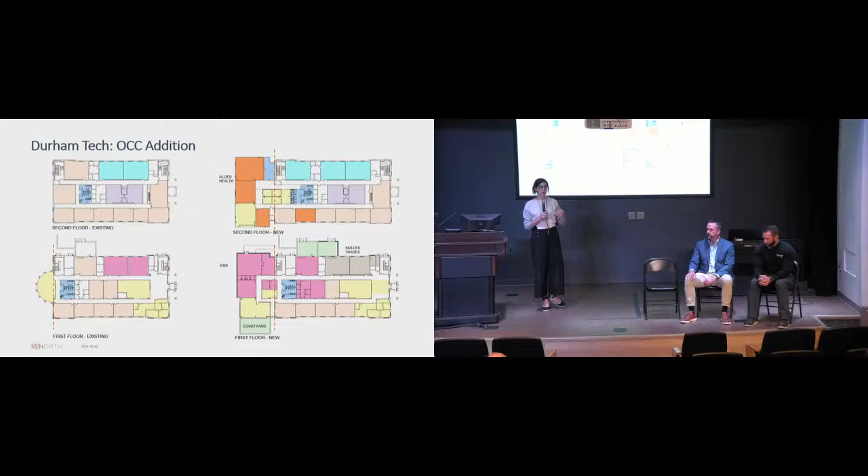When we crunched all the numbers, the engineers came back and said we can do it, but the system isn't going to pay for itself. So we decided, instead of putting solar panels on the roof, to put that money into more efficient HVAC systems and better lighting. That's really going to save us money over the long term and provide better quality, cleaner energy. The solar panels just weren't going to be a good investment of our dollar.

I just wanted to add to the Duke partnership. You may know Duke has set a goal to be the best climate university in the country, and they've stood up a whole climate and sustainability team. We got that team together with us to review with our architects, with Marie, with Susan and others, all of our plans around sustainability, and this is what came out of it. Frankly, that was one of our big priorities going into the conversations: how do we create space, either now or in the future, for a photovoltaic array. We got very strong feedback about investing mostly in the electrification of our operational systems, and the importance of that for the return on the intensity of our energy usage and carbon emissions footprint. So, great question, and something we really explored.

I really appreciate Duke's commitment to sit and walk through with us some of the choices. As part of our sustainability approach, we're trying to go beyond existing code compliance, which is already an improvement from a sustainability standpoint, but set our own goals for even deeper reductions of energy usage and water usage.

One of the challenges is we're working with a bond package in both counties, so we've got a budget. Part of what we're trying to do is find additional resources. Susan mentioned that Orange County gave us the resources we need to meet our climate sustainability goals there, and we're working with some additional partners on the two projects here on main campus to achieve the same thing. I'll go over those goals in a second.

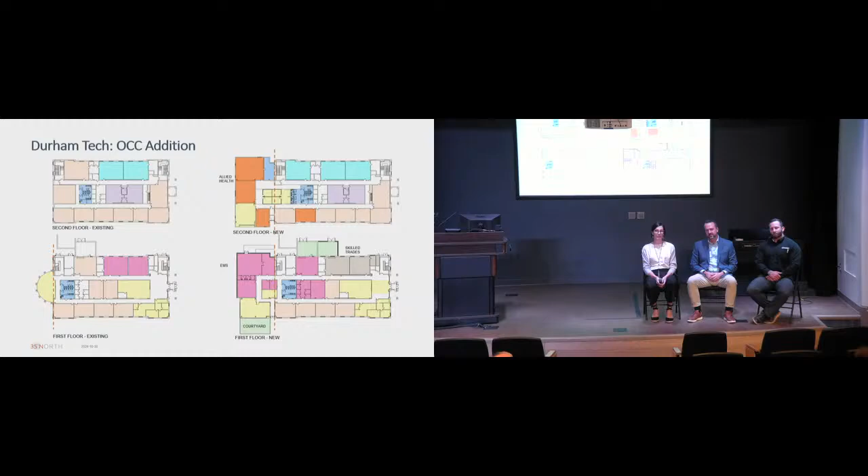So if I understand it correctly, the cafe entrance will be the main entrance in Building 10 during construction. Is that right? That's the closest entrance to that ADA sidewalk. It will be the entrance for anyone that uses ADA parking.

You can still go in the front door. All the other entrances are going to be open. Do you want to point to that, Marie, where you would walk?

Unfortunately, Building 10 is kind of cut off on both sides. But yes, to Susan's point, all entrances will remain open. But now the majority of traffic will be channeled through on this side, so it depends on which way they want to go in.

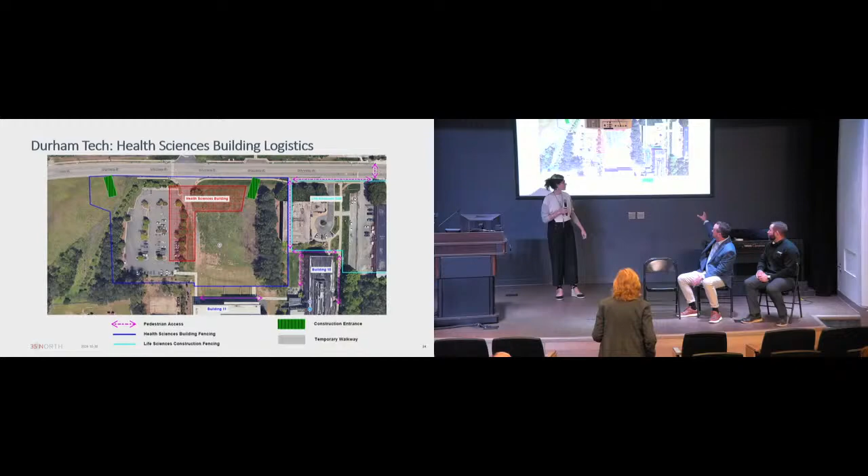But if you're parking on the south side off Cooper Street for the ADA, coming through the ramp on the side, you'll be going in through the cafeteria entrance. Yeah, the sidewalk on the right-hand side will still be available as well.

So there won't be any entrance closing. There will not be any entrances closing. Could you speak to sustainability when it comes to all of the new landscaping?

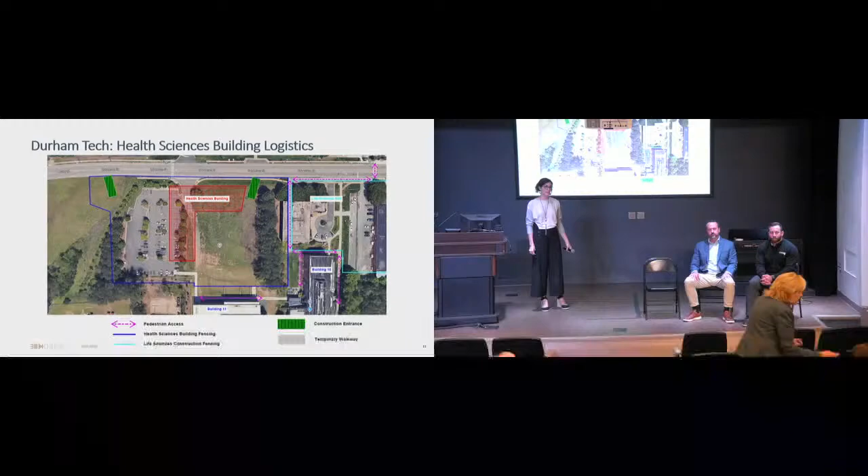That's a great question. Do you want to take that? Do you want to go to the slide? Nobody wants to touch it with a 10-foot pole. We're having those discussions now.

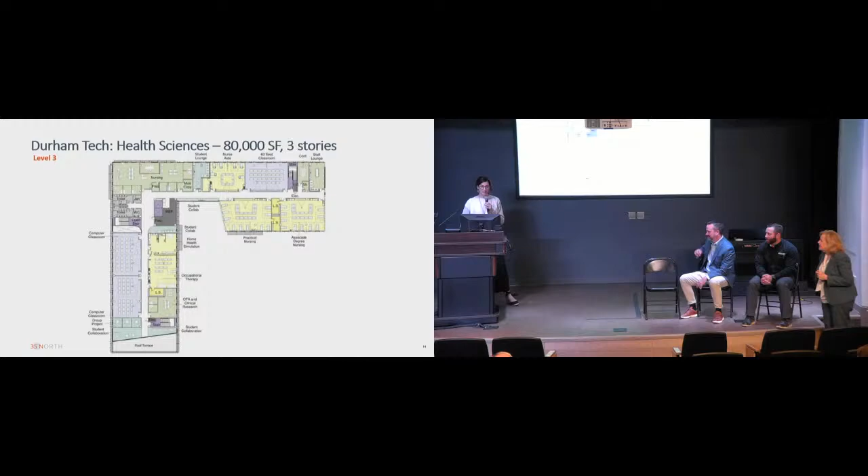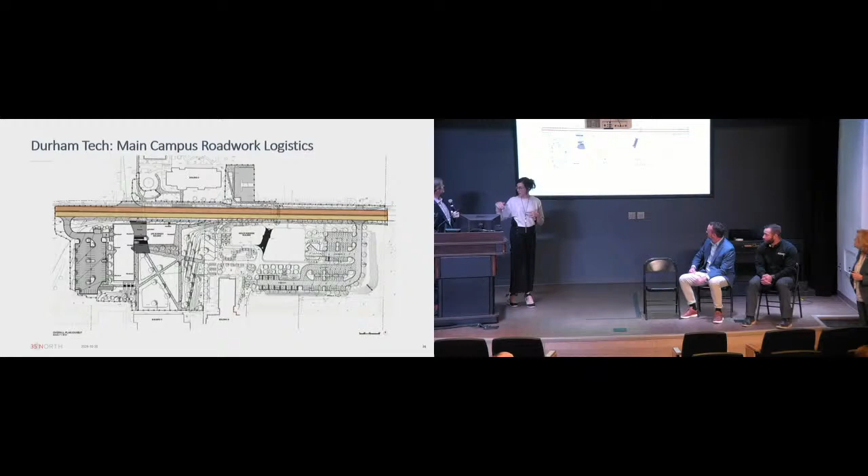I'm getting confused. Yeah, why don't we- let me think, that'd be great. Flip through for you, and then while I... And then, hold on a second, I want to, which way are we going here? The sustainability ones are way at the bottom. The last ones, yeah. Oh, no, but I want to do this real quick. When I finish this...

I want you all to think about the fact that this new 1.5 acre quad here, and then on the west side of Life Sciences, you saw the kind of bricked-in area that'll be like a terrace or a patio. But here, in between Life Sciences and Wynn, and then here, as you come down the embankment, we have all kinds of new open spaces.

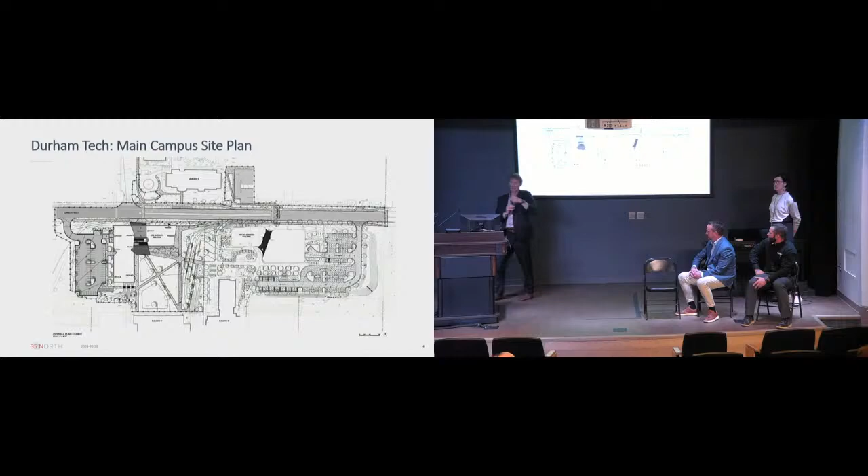And while we've dealt with some of the landscape plan in terms of what we think about with outdoor furniture, what we think about the character of that outdoor furniture, what kind of gathering spaces we want, potentially teaching spaces, there are plans. This is a little bit more open. This is going to actually have some very clear plans around furniture. But if you have thoughts today, and as we move forward, about how we activate those spaces, those are going to be new opportunities for us that we do not have right now.

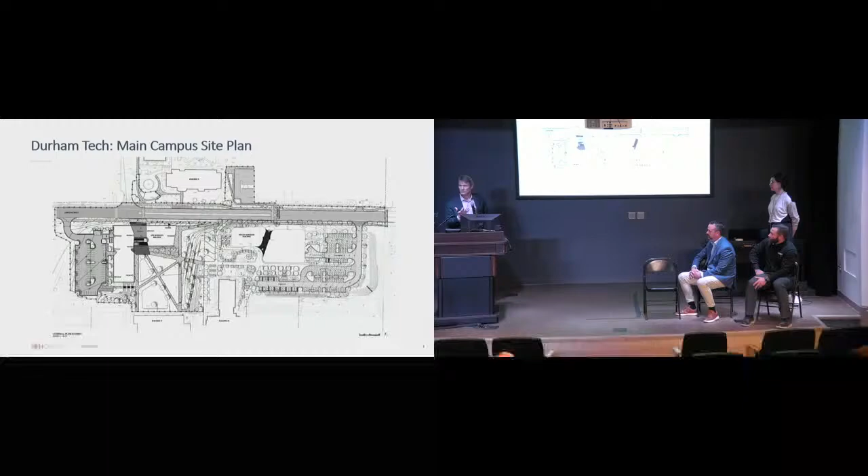All right, that's really for the geese right now. All right, so let me go. Okay, we'll wait till he's done.

All right, so the challenge in doing this work in North Carolina, and even in Durham and Orange County, is that we do not operate within the context or framework of any sustainability goals. So it's not like with HUB contracting or minority and women-owned businesses, where there are some goals in Durham, they're not in Orange, that help guide and inform us about how we want to think about doing this work. There's basically nothing besides code compliance.

We have a strategic plan that calls for us to have a more sustainable approach to our buildings and our footprint. And so, working with our architect and construction managing partners, we set some goals that we thought were achievable as stretch goals for us on the main campus and the Orange County campus projects as it pertains to sustainability and our climate goals.

We want a 25% reduction in our energy usage and associated carbon emissions, a 35% reduction on indoor water usage, 45% reduction on lighting energy usage, and then 100% reduction on our outdoor water usage.